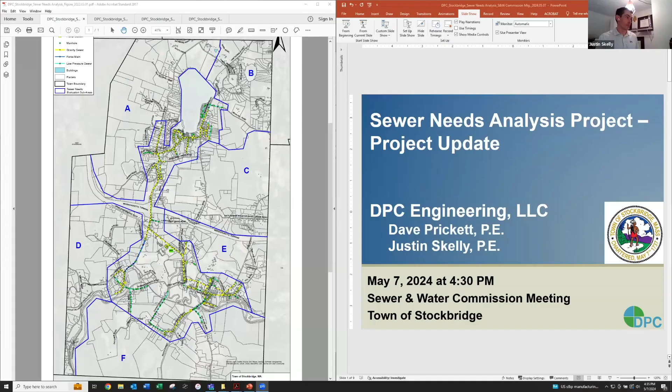Okay, so we've been working on this project for a while. We spoke with you a couple meetings ago about where things were at. This is intended to be almost a final update prior to issuance of a draft report to the commission. I just want to go through the remaining items of the scope of work that we did not touch on last meeting. Again, if anybody has any questions during this, feel free to stop me at any time, Tony or your commissioners there.

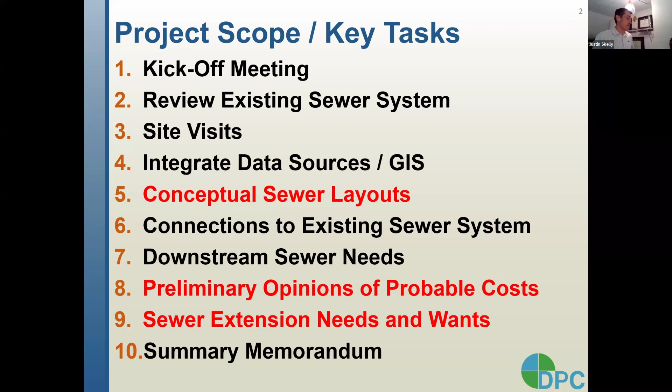So this was shown last time: the project scope and the key tasks we were under contract to look at. The ones in red are basically the ones we didn't talk about last time, and those are the things that have really transpired between the last time we were in front of you. Really nailing down those conceptual sewer layouts for the sub areas we were looking at, A through F, and coming up with preliminary opinions of costs to sewer those 6 sub areas. And then really 8 and 9 should be flipped, because we did the needs and wants analysis prior to developing the costs. So we'll present that information tonight and see if there's any questions, which I'm sure there will be.

So just to refresh everybody's memory, this figure was from the original proposal between DPC and the town. I just pulled it up to show you that, in yellow here, not looking at anything specific, but where you see like yellow blobs, that's the existing sewer system, all kind of centered in the map there. And then these larger areas on the outside labeled A, B, C, D, E, and F - that was really our blank canvas for this project.

So we were tasked with looking at each of these sub areas discretely, using various sources of information collected from the Board of Health, GIS, available state layers on depth to groundwater, soil permeability, etc. We'll go through some of that later on. We were tasked to not only prioritize which of these areas have the highest needs to be sewered, but also which ones - really the costs to do that, and then the costs per EDU, or sewer customer. And you'll see that kind of shake out later on.

Some of these areas, there's just not a ton of dense development - areas where a lot of sewer pipe are going to equate to a lot of new customers. So that just makes the math tough in the end as to how the costs actually get shared by folks, or however the town pursues a potential project down the line. And obviously that's the next step of this, and what the town decides they want to do. But just big picture, that's kind of how things were looking heading into this.

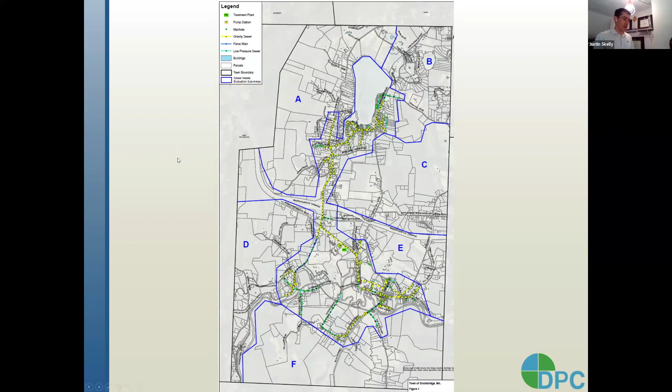We had these 6 sub areas surrounding the existing sewer system, and then looking at available information - topography, etc. - we laid out concepts to sewer parcels in these sub areas through a combination of gravity sewer and pump stations, and also low pressure sewers, which the town currently has in a few areas throughout town. So that's just kind of to frame things. This was our start here.

From there we tried to lay out gravity sewer as the first best case scenario. We'd look at the topography of the land to see if we could flow everything from the outskirts of the sub area we're looking at, the study area A, B, C, D, and try to get it all to the point of connection to the existing system via gravity.

Obviously that's not feasible. We used several guidelines as guardrails on our analysis to point us in the right direction, like knowing we have to put a pump station at a low point because continuing the gravity sewer would require something like a 30-foot excavation. Using good engineering practice and what's actually feasible from a construction standpoint, we were able to construct a concept.

So let me highlight here, just one area for example. We can get into the weeds of this later, and you'll have all the figures at your disposal in the final report.

Anything green here was gravity sewer. In this case you could see we had to flow some neighborhoods back to a new pump station. In orange are the new pump stations.

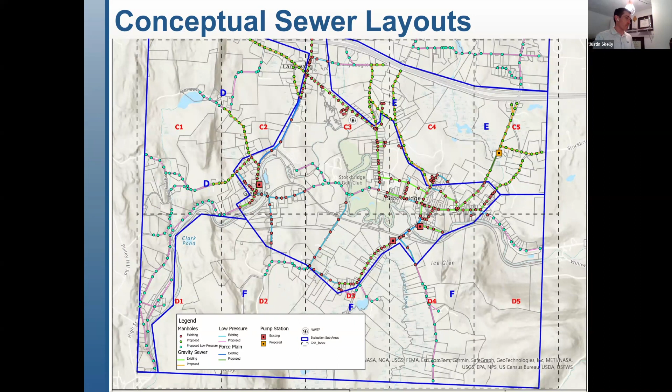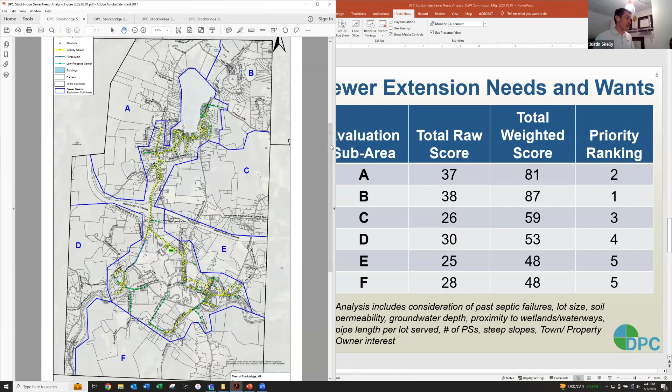This might make sense so people have a frame of reference, to bring up that original map side by side. This is really where everything started to come together. We have the sub areas, we have conceptual sewer layouts, now we need to go through and actually prioritize these areas.

Down here I just tried to note what we looked at. We went to the Tri-Town Board of Health and collected information about past septic failures. There was some other data the town had provided in the form of surveys for some lake area residents. We tried to take all the information related to past septic issues and incorporate it into the GIS database and spreadsheet models.

We looked at lot size in these sub areas, soil permeability to tell how well drained the soils are, depth to groundwater which would be indicative of harder siting for on-site disposal systems or septic, proximity to wetlands and waterways, and the density of development, meaning the pipe length per lot served. If you had to run 1,000 feet of pipe to serve one house, that gets factored in here and also shows up in the unit cost. We also considered number of pump stations, steep slopes, and town or property owner interest.

So showing you the total raw scores for the sub areas, we applied a weighting factor to each of the criteria. This will be a point where the town can take a look at in the draft memo and provide some input. We weighted things differently, so past septic failures might be more important than depth to groundwater, for example. We applied a higher weighting factor to the information we thought as engineers was more important, ranked on a factor of 1, 2, or 3.

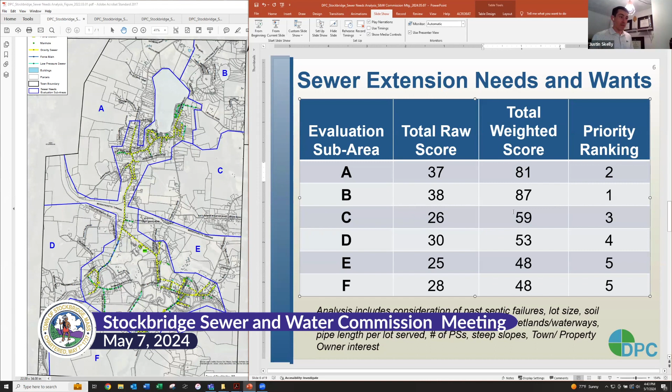So sub areas A and B ranked, but the order was switched - area A came second to area B. From there, it was really tough between C, D, E, and F. I'll say C was number 3, but the rest were pretty close together. Change one weighting factor or a couple scores, and that's pretty subjective, so somebody going through this might come up a few points different. But A and B really jumped out to me as the highest priorities from an engineering data standpoint, not knowing much about the town. You'll see that reflected here.

Do you want me to pause here for anything, or just get through it and circle back? Is this a good pace? Keep going. Okay, keep going. Perfect.

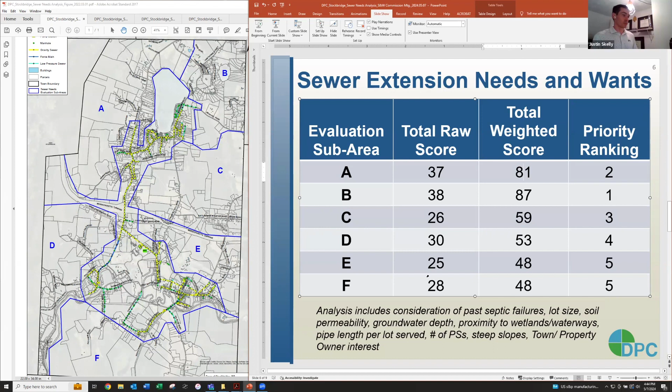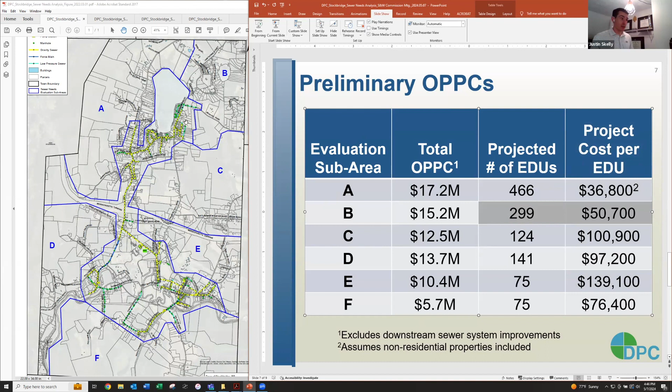I should caveat that the total cost here is everything we laid out - every stick of pipe, every manhole, every pump station shown on these conceptual layouts. It's not to say that as you move into preliminary and final design, you may eliminate a side street or somewhere that doesn't make sense - some portion of it. We didn't look at individual segments, we looked at the sub areas as a whole. So there are ways to redefine the scope and have a sub area within these larger A, B, C, D, E, F areas. Those costs are reflective of everything within those boundaries for those areas.

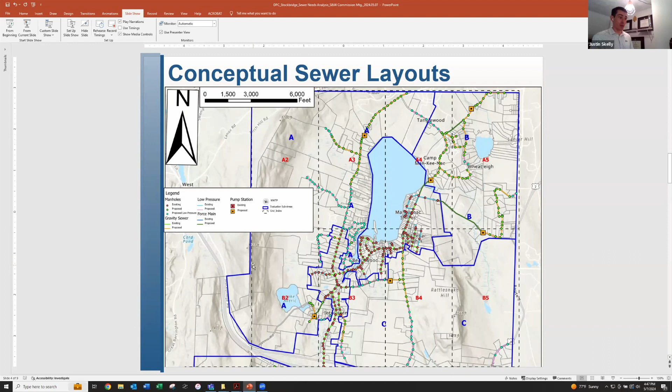So that was the costs. Yeah, I might as well just get through the rest of it here.

The one engineering task left on our end is to look downstream of where all these connections are proposed to go, to make sure the receiving sewer has enough capacity and there's no issues receiving the new flows proposed. That's the last engineering task. We already have a draft memorandum started absent that section. Once we go through that exercise in the next week or two, and another week after that, we'll finalize the memorandum and get it to the commissioners. That will include our recommendations, which you've seen some of tonight, and a proposed implementation plan to consider.

Step 3 is really going to be the most important part, and sometimes the hardest part for communities - identifying a funding and finance strategy that makes sense for the town, whether that's USDA rural development, state SRF, local financing, et cetera. So that's the next part - finding out how to make this affordable for those that need to bear the costs.

Once all that information is in your hands, we're going to be looking for your input back on that draft memo. Then it'll be on the town to decide what the next steps are and maybe start to coordinate with some of those property owners in those sub areas of interest for potential next steps down the road.

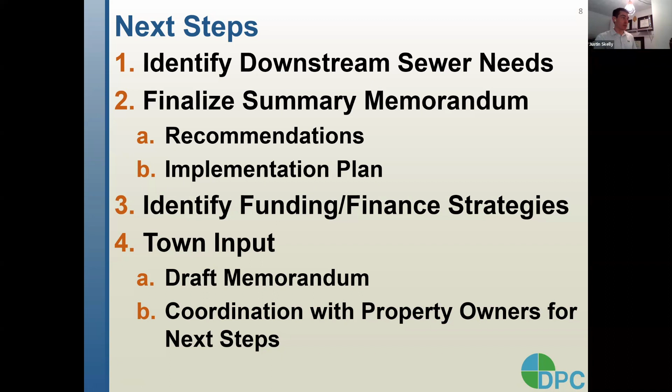If there are next steps, here's the bigger picture of what those would be. First, define the limits of an intended project. So say you've selected sub area B and want to move that one forward, you'd define the limits within that. We looked at that entire area wholesale, but you might want to break that down and phase projects, do portions of it. The whole thing doesn't have to be constructed at once.

Once you've defined the intended project, you kick off a preliminary design phase. That's where actual detailed survey comes into play, soil borings to determine the extent of any ledge or rock, to help refine that opinion of probable project cost that was developed. It'll also help refine the pipe layouts and the number of lots served based on this early desktop analysis, so you get to define the real numbers there. And then, most importantly, updated costs and unit cost per EDU based on going through preliminary design.

Once you have that preliminary design, it's a lot easier to go through the funding and finance strategies and approach some of these funding agencies once you have more of an almost shovel-ready project - whether that's local, SRF, USDA, or a combination. And then obviously the big one is town appropriation.

Any construction project will typically have to go through a town meeting vote, so that would be one milestone. Then it kicks off into final design, bidding, and construction of the project. I show this just to say that even if you said go tomorrow on any of this, the overall timeline from today, if it was a go, is approximately 3 years.

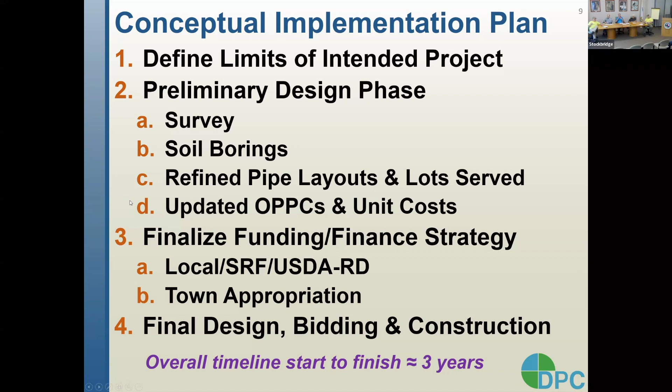I just have a couple of quick questions. I wanted to make sure that if there's people out there listening, on Zoom or otherwise, that the numbers presented currently are for the areas as a whole. We did the same thing when we did our project in 2002, 2003 - we took, I think, 12 sub areas because these were included as well. They were a little smaller, and we did the whole analysis, then condensed it down to where a more feasible lineal footage for our money came into play for price per foot.

So I know people watching might say, oh my gosh, that's a lot of money. I just want to remind people that since 2005, the world has changed and prices have pretty much doubled, whether it be materials and so on. We're looking at this as the whole thing - that's what we asked them to do - so it can always be shrunk down or whatever. I just want to make sure people aren't thinking that map is set in stone. It can be condensed, correct, Justin?

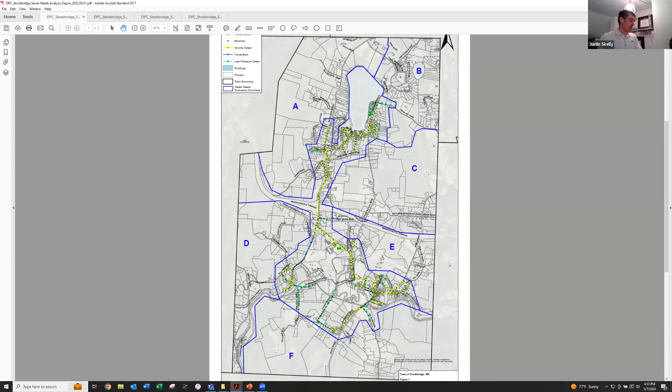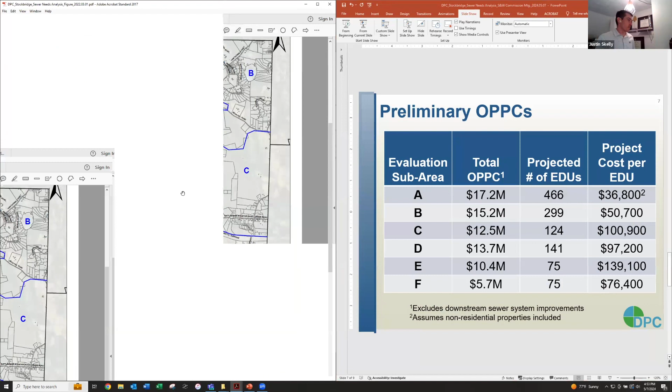Correct, yeah, that's a really good point, I really wanted to drive that home - thank you for mentioning it. I just wanted to back up a little and make sure people realize that. Yeah, no, that's a really good point, I'm glad you reiterated that. That was a very important point - that was the entire sub area.

I think what we need to do now is just get copies of that and start going over it. Let them finish it up, let them get the report to you guys on paper, a copy where you can thumb through it, take your time, look at it, scan it.

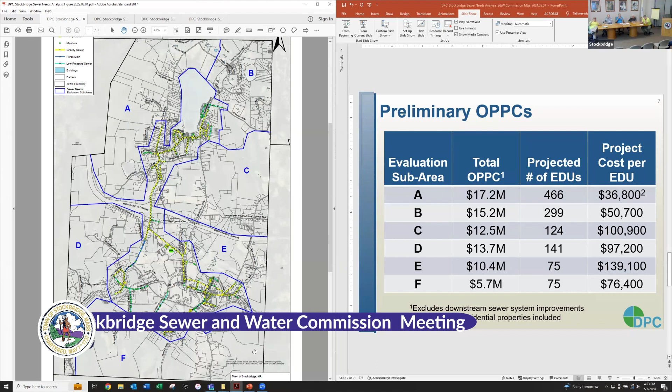But I just want to make sure everybody realizes, out there and here, that this is what we asked them to do. We asked them to do a complete needs study, so that's what they gave us.

It can always be condensed. We can park it, we can do whatever we want with it, but here it is. Yeah, this is what we wanted. This is what we asked to get done.

So this is all very, very important to us and for the lake. I appreciate the town taking the time to really study this. Thank you, I look forward to what's going to happen. We'll see. Okay, thank you.

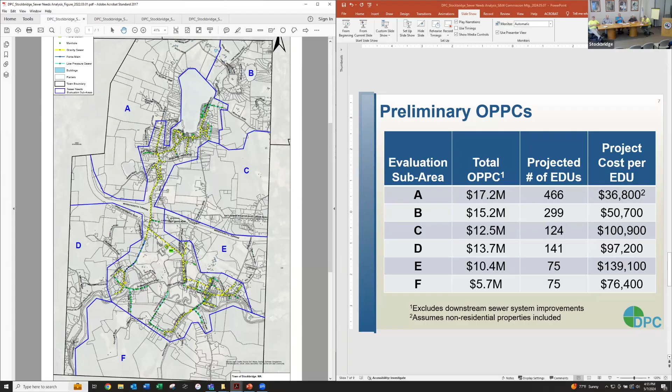Okay, good. Final report on the Park Street station. You ready?

I should have had some minutes or something, I probably should have copied you guys on the latest work schedule. This is this week. Well, I'll start with last week, 5/2 to 4/30 to 5/3.

Berkshire Gas hooked up the moved old, used generator. That's all plumbed in and ready to go. Our electrician subcontractor, Elm, continued with his electrical work. The station is currently hooked to the grid, and they're just making final connections in the cabinetry and stuff for things to operate and to have a startup.

The pumps are installed in the wet well. The phone line will be installed tomorrow, which will provide us alarm activation and things like that. So when we do start up, I want everything to be as ready to go as it will be when it's normal. And to do that, we had to wait a little longer.

There was talk maybe we could run on a generator while we did the startup, and I don't want to do that. I want to be on the grid, I want to have the backup power available in case, for a few more days now. I think we all can wait a couple more. I can at least.